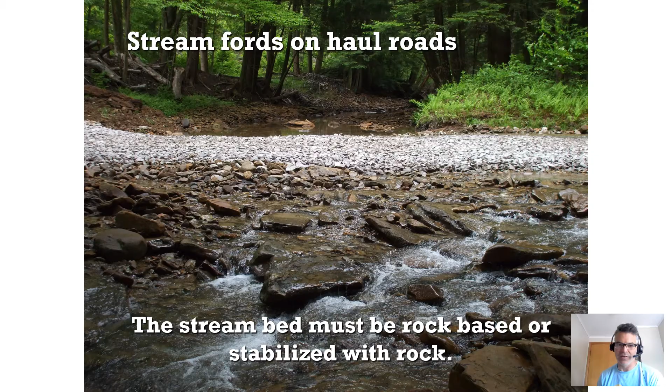Streams should be crossed at as close to a right angle as possible, and approaches are to be rocked 100 feet on both sides of the stream. Again, similar to rocking near roads entering the highways of the state, in order to avoid getting mud into the stream, that rock approach will minimize the mud on tires entering into the stream.

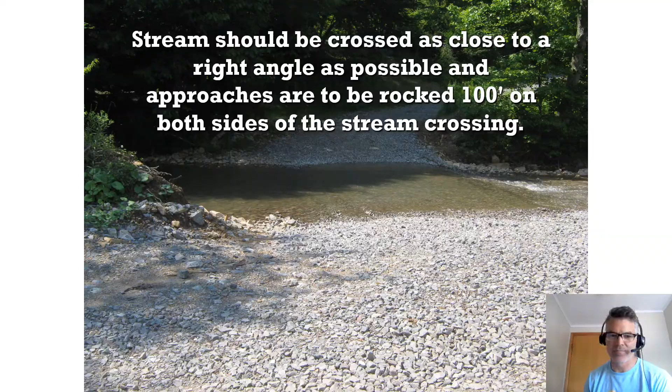Temporary bridges are another way that we can cross a stream, and these actually keep the equipment out of the stream and cause less opportunity for impact of that stream from our operations. Properly installed, temporary bridges can also be used to cross streams.

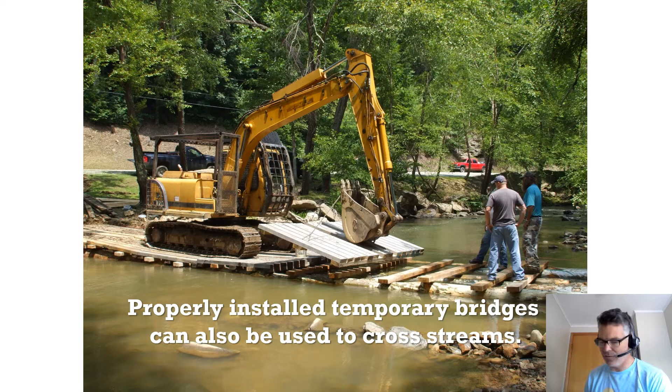This here is an example of an excellent temporary bridge for a stream crossing. You'll see that the crossing is wide and stable. The disturbed soil in the SMZ is seeded and mulched, and you see a good quality rock 100 feet on both sides of the stream crossing.

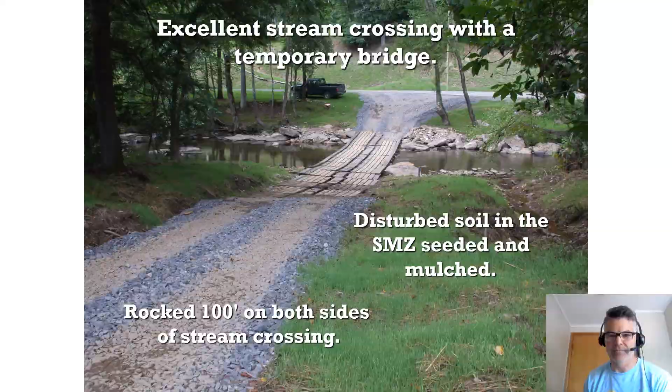When constructing haul roads with ditch drainage, we should refer back to the BMP manual for the culvert spacing. We've included that table here, and effectively it means that the lower the grade of the road, so the less steep it is, the further the distance that the spacing between the culverts can be.

So at a very gentle 2% grade, the maximum distance between cross drains was about 400 feet. If we move up to about 10% grade, we can go up to about 200 feet, so the distance is half there. So the steeper the ground is, the closer the spacing is required for cross-drain culverts. And again, the idea of this is to minimize the amount of water and the speed of water that is going to be handled by those culverts.

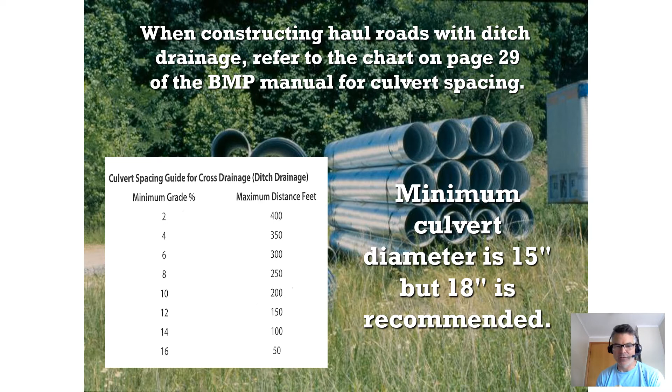When putting in cross-drain culverts, the minimum diameter is 15 inches, but the West Virginia Division of Forestry recommends 18 inches as the recommended minimum, as they are much less prone to clogging. When you put in a culvert, installation should occur at a 30 to 45 degree angle, pointed in the downhill direction, with enough slope to properly drain.

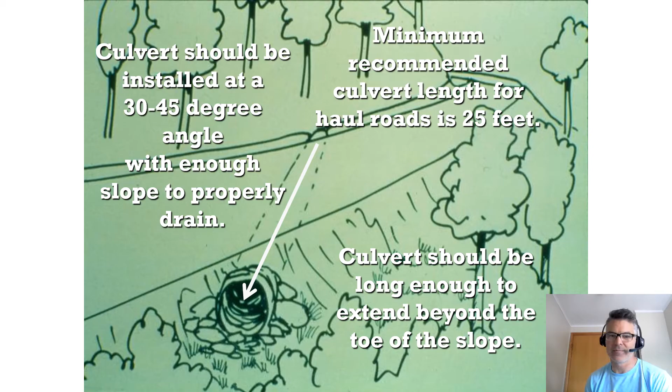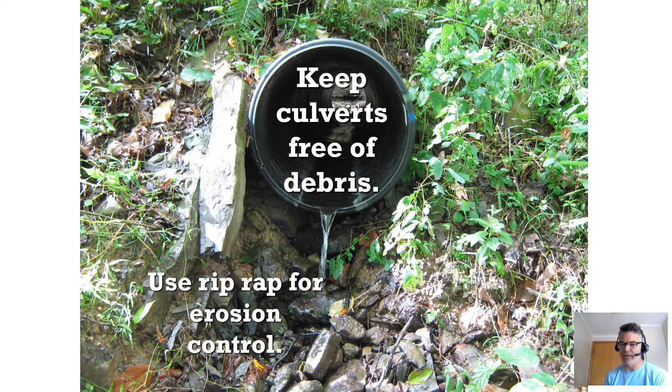You want to have a minimum recommended culvert length of 25 feet, and it may need to be longer depending on the width of your road. The culvert should be long enough to extend beyond the toe of the slope in order to disperse the water away from the toe and maintain the stability of that road surface. It's critical to keep culverts free of debris, and we often can use riprap or rocks piled at the outlet of those streams in order to control erosion at the outlet.

Similar to cross-drain culverts, a broad-based dip can also manage water from the surface of the road. Properly constructed broad-based dips can be used to drain surface water on haul roads with grades less than 10%. The spacing of these broad-based dips should be approximately 100 feet, but not more than 150 feet apart.

It is recommended that you use 3-inch diameter stone in the dip in order to avoid rutting. The dip needs a 2 to 3% outslope as well in order to effectively drain. Also, like a cross-drain culvert, the outlet of the dip should skew about 30 to 45 degrees on the downhill side in order to disperse the water to the outside of the road.

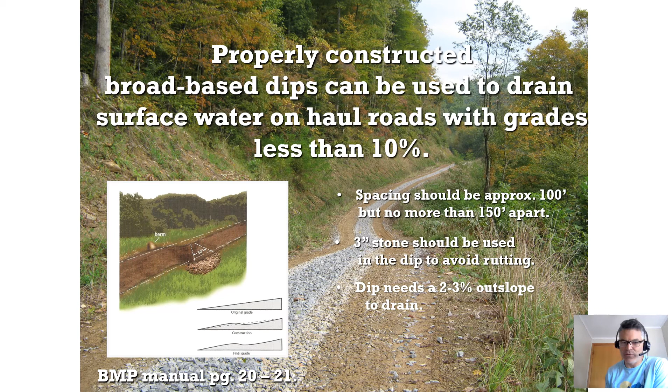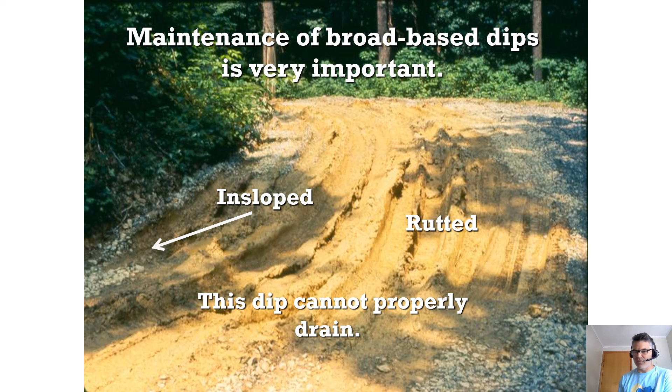And then also the rock that was placed on this was too small of diameter, and so that rock was integrated into the mud and is not actually supporting the running surface of the road. Water therefore soaks in and causes the mud. Overall, this dip is no longer effectively operating and should be repaired with larger rock, outslope, and smoothing to get rid of the ruts.